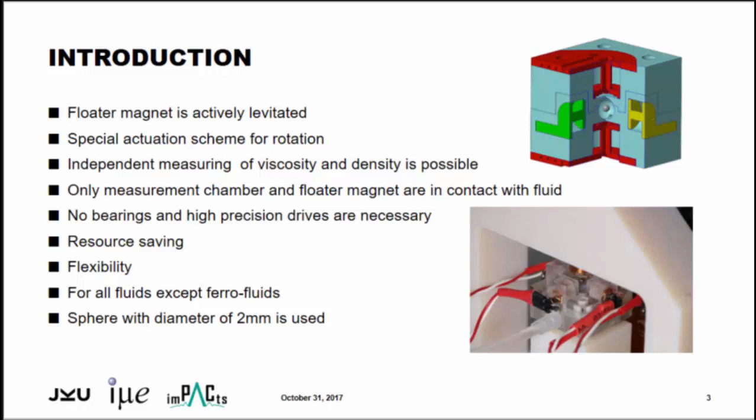There are a lot of benefits for this system in use because no bearings and high precision drives are necessary for any measurements. It is resource saving due to the small chamber size of about 6 millimeters diameter. It also works for all fluids except ferrofluids. Now I want to describe the measurement setup.

I want to start with the backbone of the system, which is the top and the bottom body of the system. This body contains the measurement chamber, the space for the levitation actors, the inlets for the fluid, and the space for the oscillation actors.

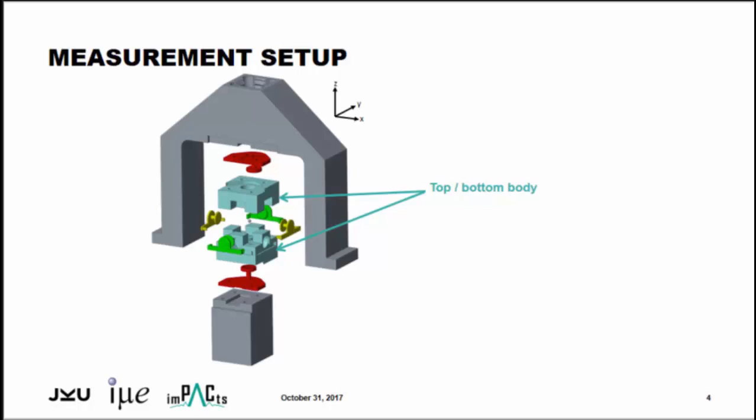The next thing is the floater magnet, which is here a sphere with a diameter of 2 millimeters. The next part is the levitation actor. Two of them are built into the system, as you can see. It contains the levitation coils and the Hall sensor for measurement of the position of the floater magnet.

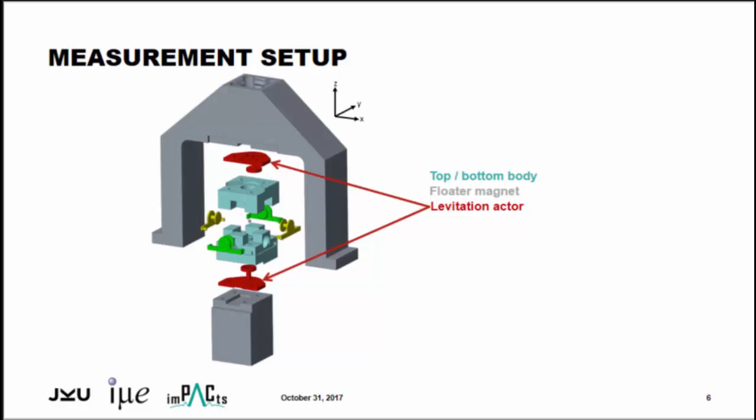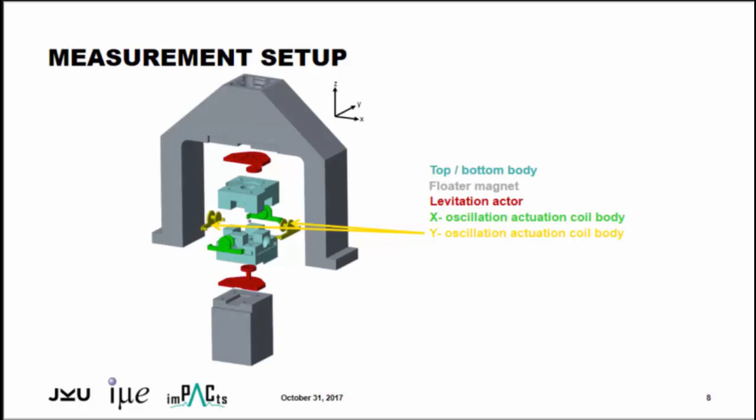There are also readout coils for the rotation on the levitation actor. The next parts are the X and Y oscillation actuation coil bodies, which contain the coils for the actuation and for the oscillation, and afterwards the rotation. The last part of the mechanical system is the additional permanent magnet brackets.

These parts are used for the whole measurement. Now I want to describe the density measurement principle.

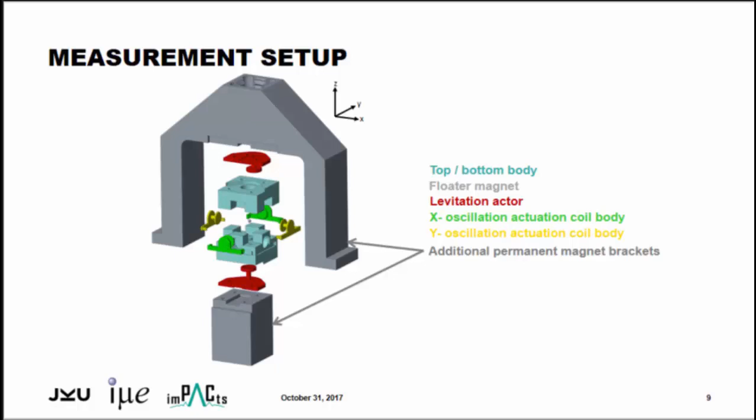Here we have the two levitation coil actors, the levitation actors here and here, and the levitation coils. We have two Hall sensors near the floater magnet, which measure the position of the floater magnet itself.

Due to the actuation of the coils to hold the measurement body in the middle of the measurement chamber, we have influence on the measurement of the position of the floater magnet or the measurement body.

So we added two Hall sensors outside the levitation actors, which merely measure the influence of the levitation coils and the influence of the digital PID controller, which regulates the position of the measurement body. We also have two permanent magnets for a higher magnetic field and higher forces in our setup, to reduce the current in the levitation coils.

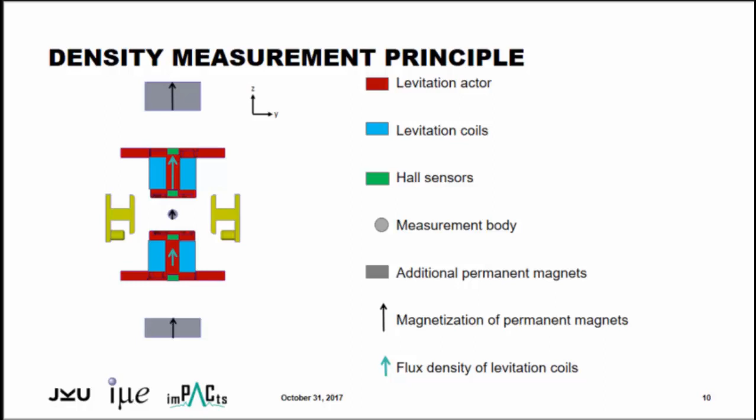In case of a measurement, there are three forces acting on our measurement body: the gravity, the buoyancy force, and the force due to the magnetic field.

Here we see the controller output relative to the reference density. You can see that the absolute value of the controller output is decreasing with higher densities.

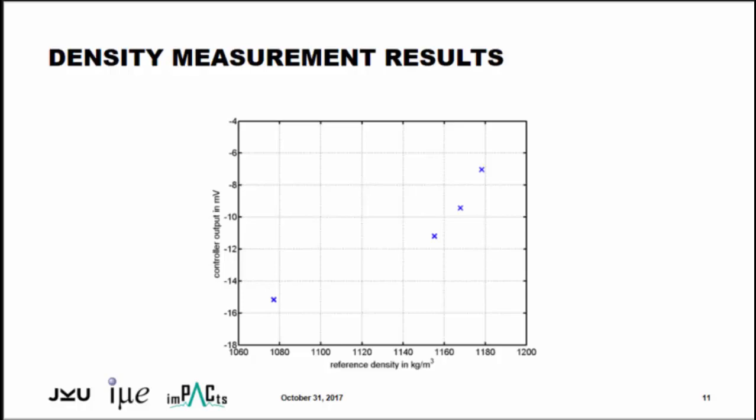The other thing we want to measure is viscosity, so I want to describe the measurement principle for it. Here we have the coil bodies and the coils in Y and X direction, which can put the floater magnet into rotation.

At first, I want to describe how they put the floater magnet into oscillation. If the oscillations in X and Y have a phase shift of 90 degrees, a torque around the z-axis results from it.

This torque leads to a rotation in the z direction, or around the z direction.

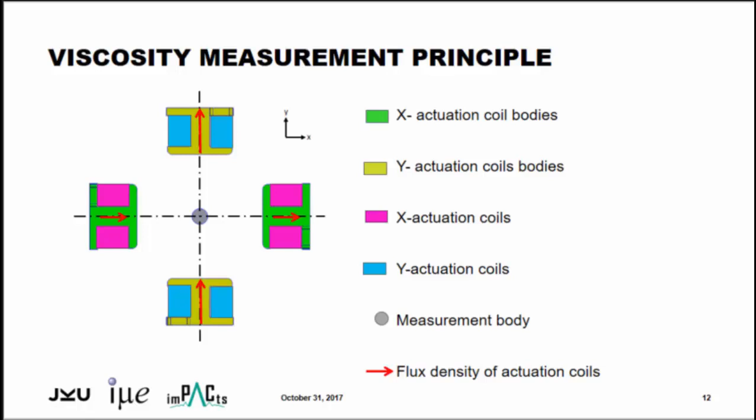This we have animated. As you can see here, we have the magnetization direction of the floater magnet itself, and the flux densities in X and Y direction. This is how the floater magnet rotates around the z-axis, as you can see here.

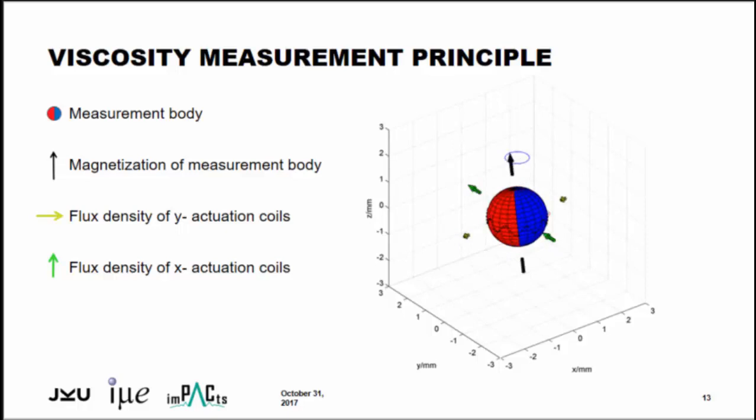This rotation can be read out with two coils. They are located here and here at the levitation actor. Here we can measure the induced voltage, which is modulated by the rotation of the permanent magnet.

We already checked the dependence of the rotation frequency on the actuation amplitude in volt peak-to-peak. As you can see, from 5.9 to 7.5, the rotation frequency of the floater magnet increases linearly with the actuation amplitude.

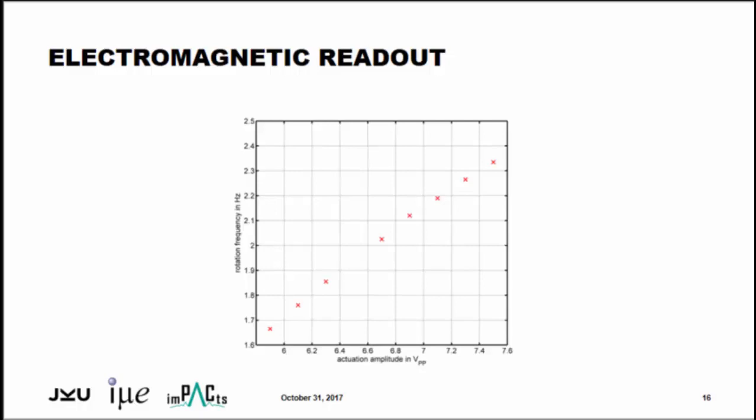We also made some measurements with different viscosities, and the behavior is shown in this slide. You can see that with increasing viscosity, the rotation frequency decreases.

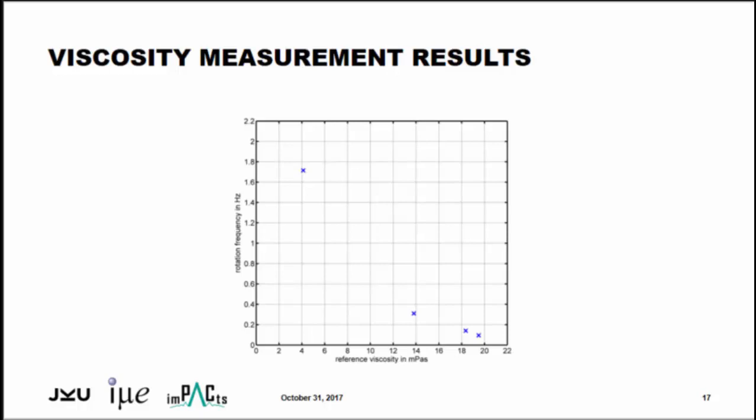At last, I want to give you a short outlook of the system. We want to control the temperature of the fluid in every measurement. We want to increase the range for measurements for higher viscosities.

We also want to increase the resonance frequency of the system, and we want to make the resonance frequency electrically tunable. So that was all.